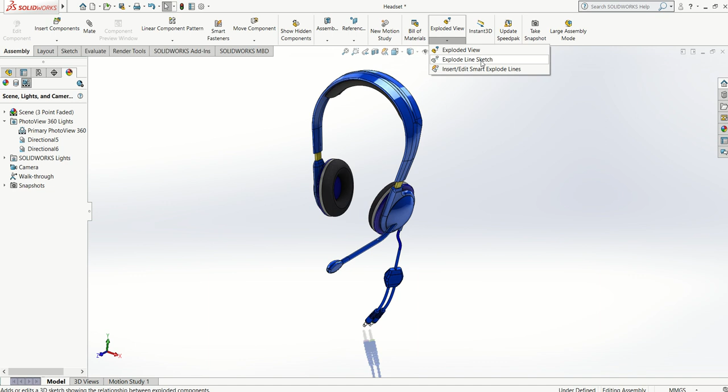So what I'm going to do here is go to my assembly tab and up here to exploded view. Now you have different options here, explode line sketch and other options, but we just need the simple exploded view.

What you're going to do in this area is select your parts. You can pick them here in the image or bring the design tree down and select each part individually. So say for example if I wanted the cable, I could find the cable jack, select it, and then maneuver it using my 3 axes. For me, I'm going to put it out by the Z axis here.

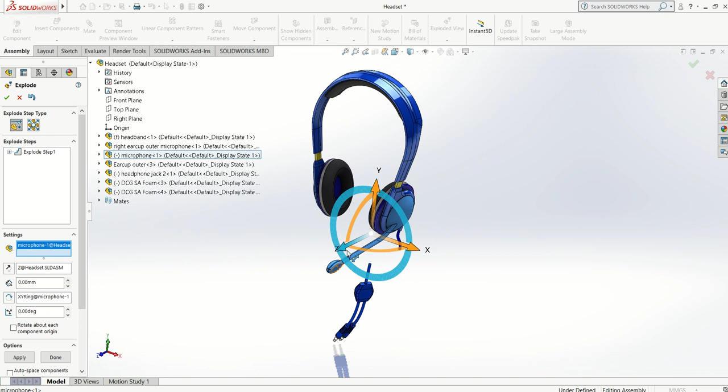I'm also going to select the microphone, bring that out by the Z axis, take the earpiece, bring that out by the X axis. Back that way a little bit, put that one back there a little bit, and just tweak it around until you think it's going to be a nice view, showing everything off nice and clearly and separate. So that shows all my parts.

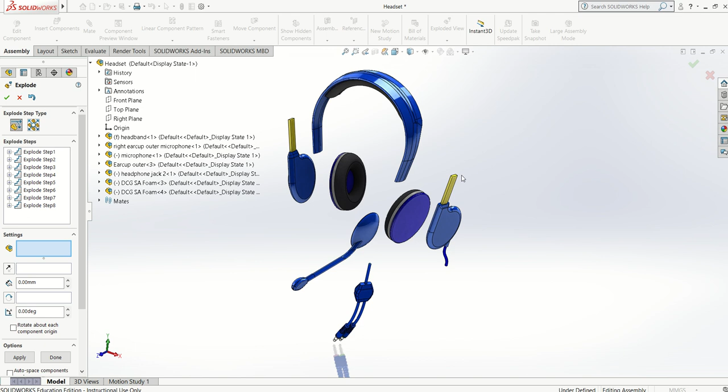I can hit the green tick and that's my exploded view. Now what I'm going to do is go up here to the floppy disk icon, to the arrow beside it, and go to Save As.

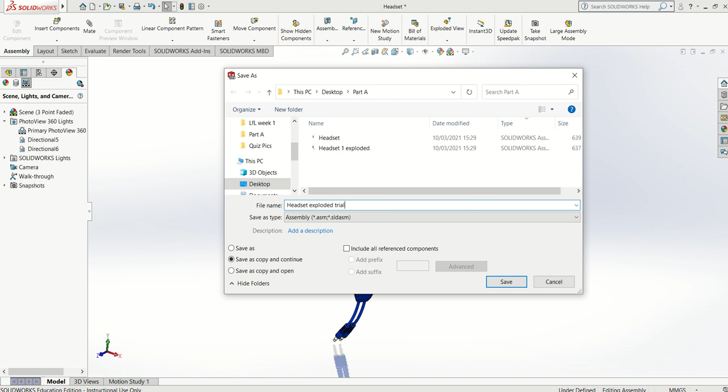I'm going to save as a copy and continue, and I'm going to call this headset exploded trial, because you can see one is already done, and I'll save that in there. It's an older file, so that's fine.

Now what we're going to do is insert that into our page number 2. I already have the drawing page open, so if I minimize it down, I can go to my drawing page, and I have it in page 2. This is going to be where my exploded view is entered.

So I go to my view palette, and again I can upload my file. I want to go and find my exploded view trial, so here's headset exploded trial, and I open that up. Now you can see these are all assembled, and we have one view that is an isometric exploded assembly.

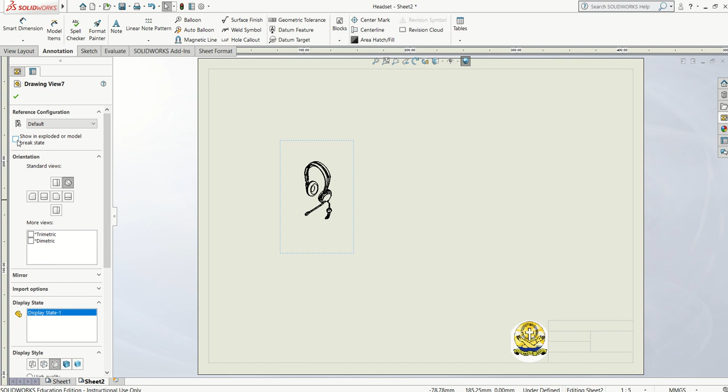Now if I was to bring in just an ordinary isometric view, when I bring that in, I can click here to show in exploded state. So again, we want to get that maybe just a little bit bigger just to show off first, so we'll go to scale, 1:1. I'd say 1:1 is probably too big, we'll go 1:2.

Showing the color view, and then I'm going to go up here to the top and click show in exploded state. Now that will only come up if you actually have completed an exploded view or completed the action of exploded view in your assembly.

So it'll give me exploded view 1, and exploded view option 2, which is the one I created. You can pick whichever one you think is going to be the best option for you and to show off your product best. So for me, I'm going to select that one.

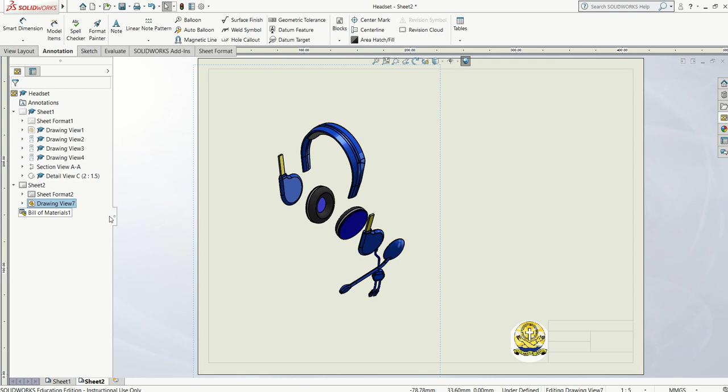Now if you wanted, some people would like to bring in each part or each component individually. So what we can do again is go to the view palette, open up each part. So if I wanted the headset, the headband, I could open that and bring in an isometric view of that, or a front elevation view, just to bring in each component individually.

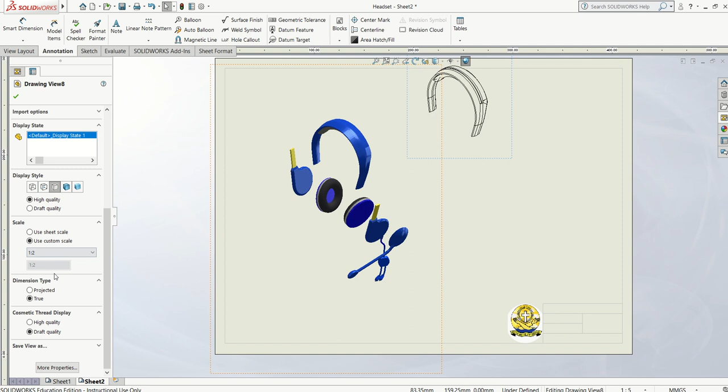So again, select on that view, scale, custom scale, 1:2. Again, I can do that for each component if I wanted to bring it in, find it.

Maybe my isometric view. So what I don't like about this view is it's actually showing the back of the object. So what I can do up here is change my view palette, or what I could do is actually delete it.

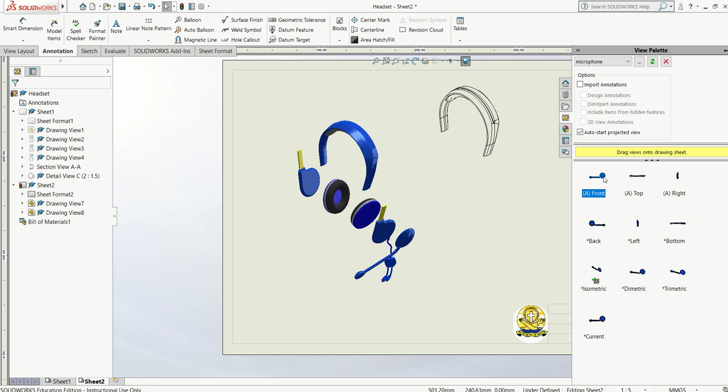I can bring in the front view, then if I move up at an angle, I'll get the 3D. So I might come down this angle, up this way. I like that view, that's the view I want.

So now that I have that 3D view, I can delete any views that I want, and this is the view that I do want. So I can then change that to a bigger view.

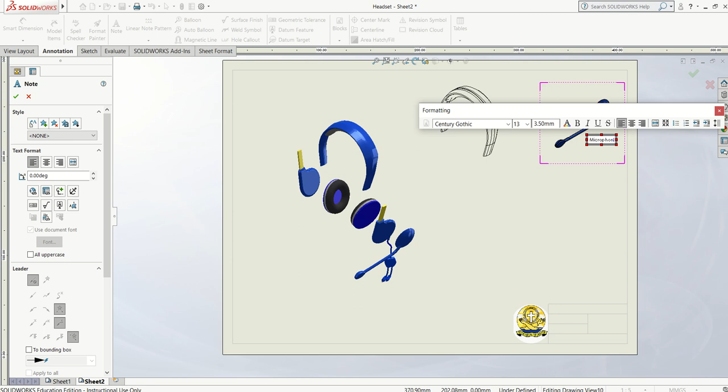I can bring that over to have an individual component, and again pop it into color, and I want to add a little note underneath it that this is the microphone component, or whatever it might be the case that you want to enter, and then that can go there. You can put the scale or the information, whatever else you want on it.

Again, you'll notice that the sheet format doesn't transfer over to sheet number 2, so you'll have to enter in again your sheet number over there.

So again, spread out your page, put in your information, make sure that it's not overcrowded, make sure that the layout is as good as possible, that you have as many dimensions in as possible that do not overcrowd each other, and that is how you would insert your exploded view.